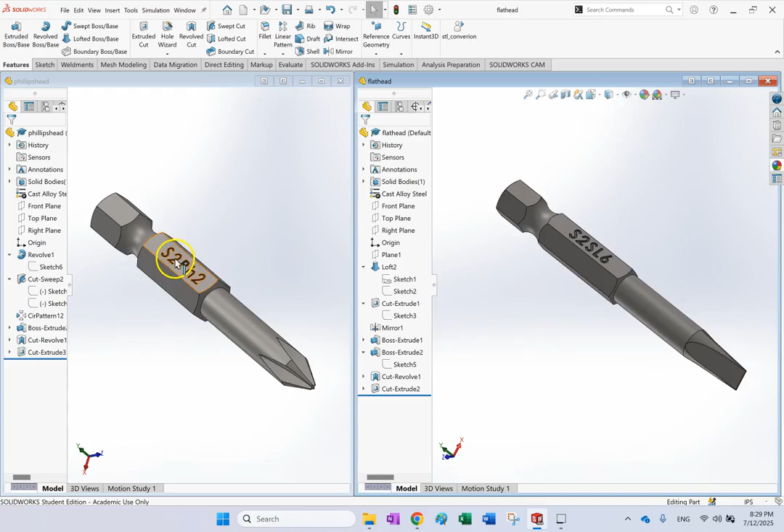Hello everyone. In this video, I want to show you how to make flat and Phillips head screwdrivers, the head part of them. I was working to make these ready for my lecture tomorrow in my CAD class, and I saw that although they look not very complicated, they might have some interesting features I want to talk about, like these letters you see on them, S2PH2 or SL6. I want to briefly tell you the meaning of these letters, so if you're dealing with any of them, you have an idea of what they are.

So for the flathead, let me talk about the dimensions. This is a flathead. Basically there is only a small narrow rectangle, as you can see, and there is this circular cross section, and the head is connecting them together, so it looks like a loft to us.

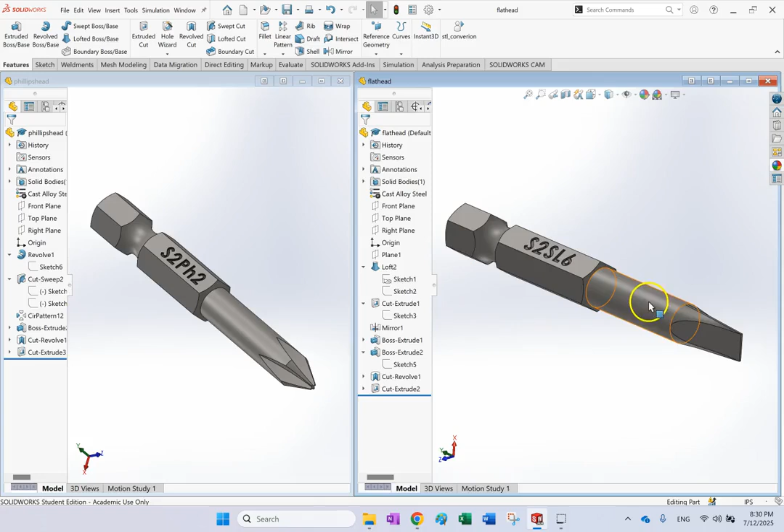The size for it, the letters on it, say S2SL6. What does that mean? SL means slotted, which is another name for flat head screw or screwdriver, meaning just one single rectangle. S2 is the name of the steel used here. And 6 is the width of this head - this dimension from top to bottom is 6 mil, so it can be used to open a screw whose slot is only 6 mil wide. So that's S2SL6, and it's quite clear.

For instance, if you look at these pictures, you can also see that - this is head size 3, SL3, SL4, 4.5, 5, 5.5, 6, and as you go from left to right, it gets wider and wider. So that's what a slotted or flathead screwdriver is.

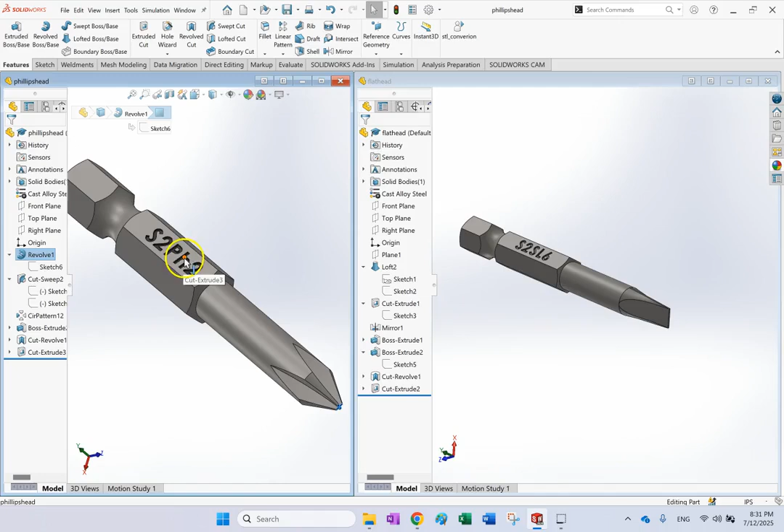On the other hand, for a Phillips, which has basically a cross at the tip, it's very easily distinguishable from a flat one. The only difference is here it says S2PH2 - again S2 is the material, PH means Phillips, and 2 is the dimension.

Now 2 here is not necessarily the width of this guy from left to right. The dimensions for a Phillips are a little bit not completely linear as you'd expect. For instance, if I have a PH2 screwdriver, you might say the size of the head is 2 mil - not exactly, it's actually 2.29 mil. Or if it's PH3, this is 3.81.

And what kind of screw could you use it to fasten or unfasten? PH3 is used for M6 and M7 screws, M3.5 to 5 use PH2, 2.5 to 3 use PH1, and zeros and double/triple zeros are used for smaller screws. So as we move from smaller to bigger numbers on these PHs, you're able to open bigger or smaller screws, but this number and the actual dimensions are not exactly the same. That's regarding the letters you see on them.

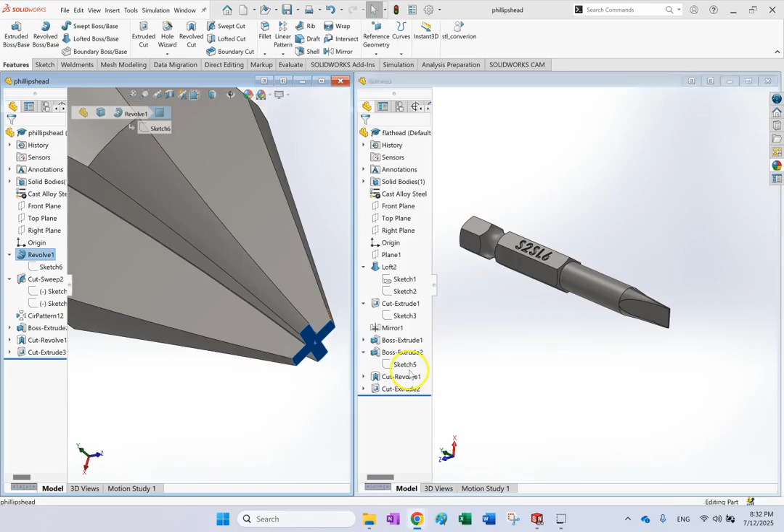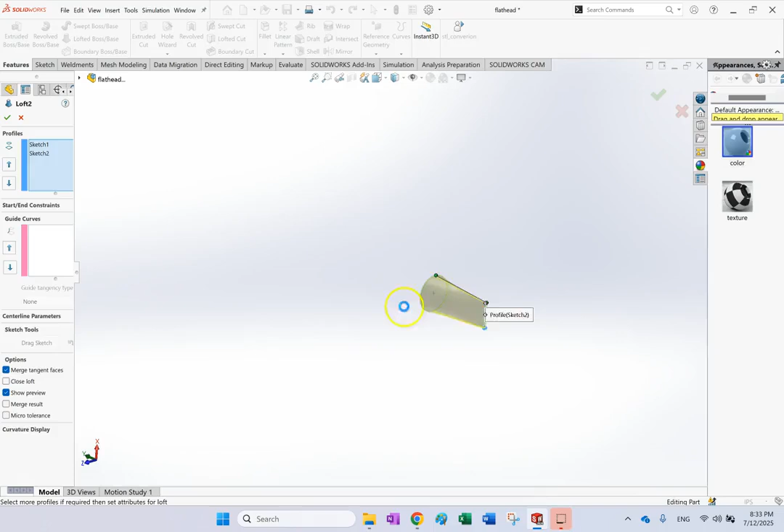Now, how do we make them? For a flat one, as you'd expect, the first part is simply a loft. I have a circular cross section and a narrow rectangle on two offset planes, and all I need to do is connect them with the loft. The only important thing is to make sure these two points aren't misaligned - if a point comes here you'll get a twist. Make sure the points are right in front of each other, as you can see, and that gives you the first part.

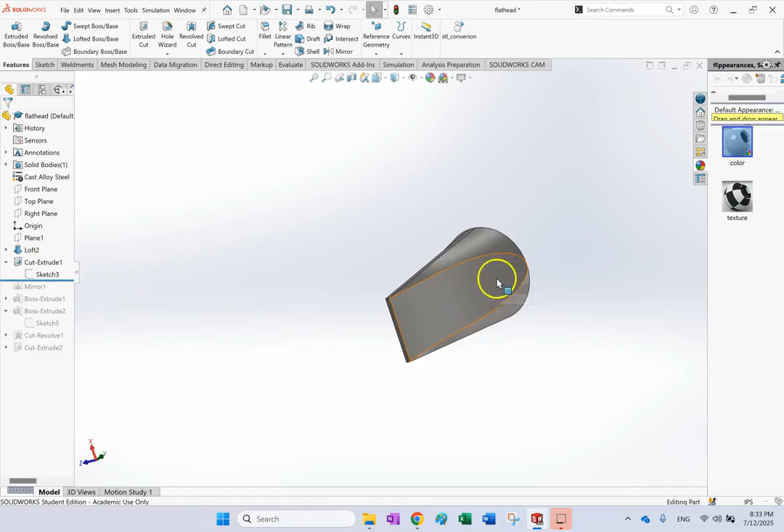The second part is those cuts that you see, this one here. This is just so you remove - let me show you from the side - this portion of the material. Compare it with this side that doesn't have it right now because I removed the mirror. This is so the head can easily be inserted into the head of the screw, so we remove some part of the material.

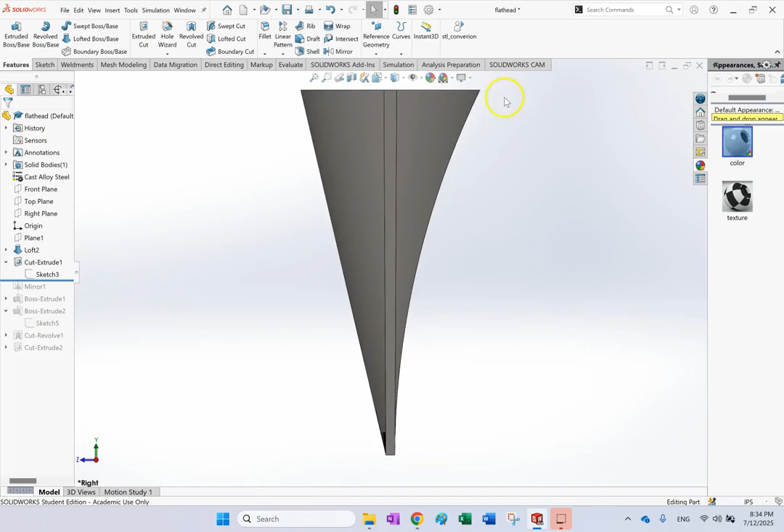And as you can expect, it's basically a cut extrude, that's all it is. The profile for it is something like this - that's all you need, basically this arc here and two lines.

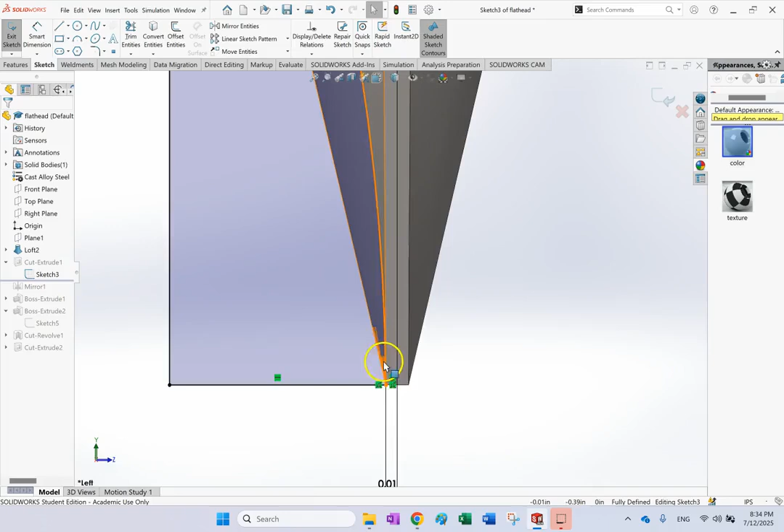If you want to get it exactly as nice as this, so that this surface's end looks like an arc and reaches the end of this rectangular surface here, then you need to make sure in this sketch this arc is tangent to this vertical line. So you see here I have a tangency - if that tangency isn't there, those arcs will not get to each other.

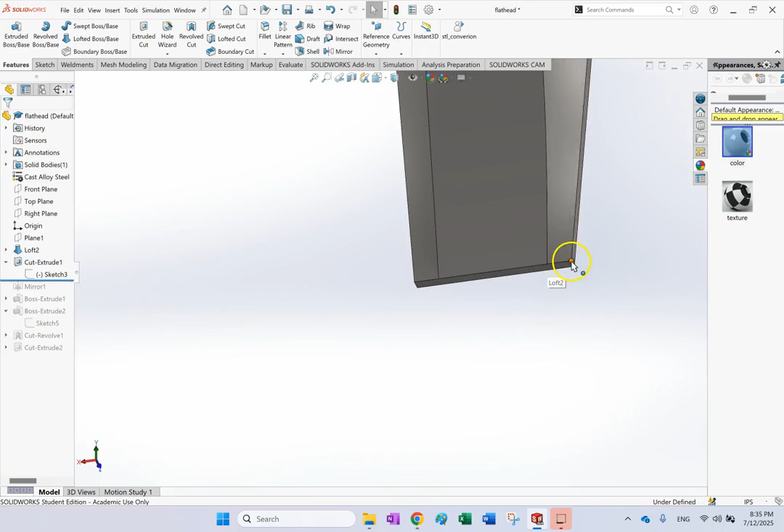Let me show you - here I get rid of the tangency and make it non-tangent. See what happens? Look, you see that? Now there's this gap between them, and the end of this arc and the end of the rectangle surface don't reach each other. So make sure you definitely have that tangency condition, so you get the proper cut.

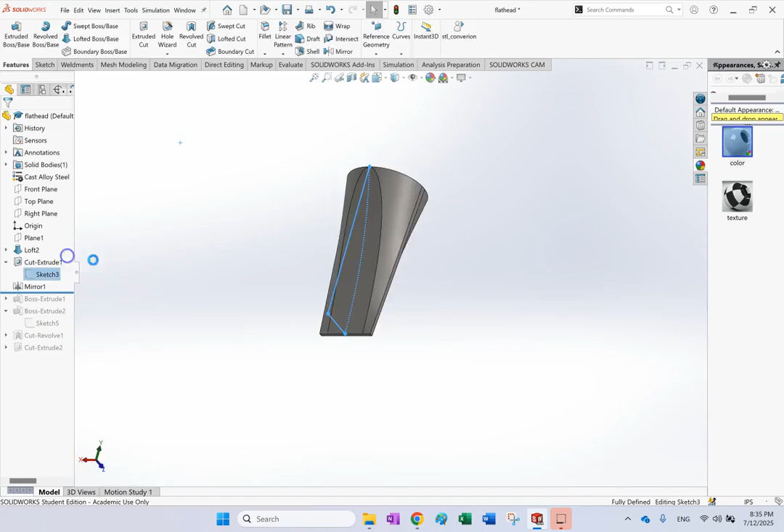Okay, so now that I got that, I can go ahead and mirror this. Let's go ahead and do that. Let me update this and make sure this sketch is right - I guess the tangency, let me do it one more time just to be safe.

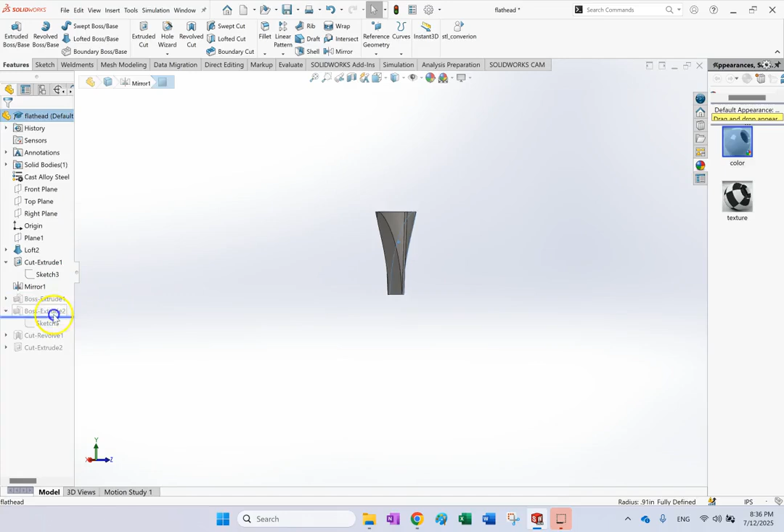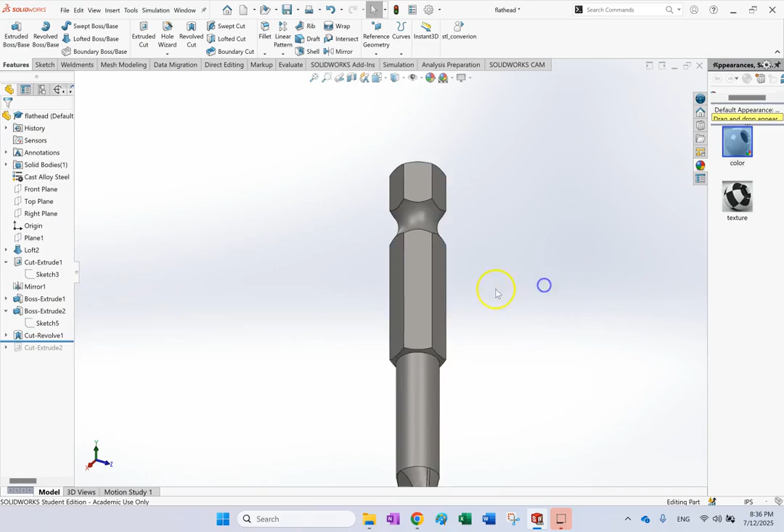Okay. There we go. Right, and then of course you're gonna have some extra extrusion here for the shaft. Then you have the hexagonal part, right? So here, look, there we go. And then you're gonna have a cut revolve, which is gonna make this surface for you, this surface, and this surface. And finally, you have your final cut extrude, which is basically these letters.

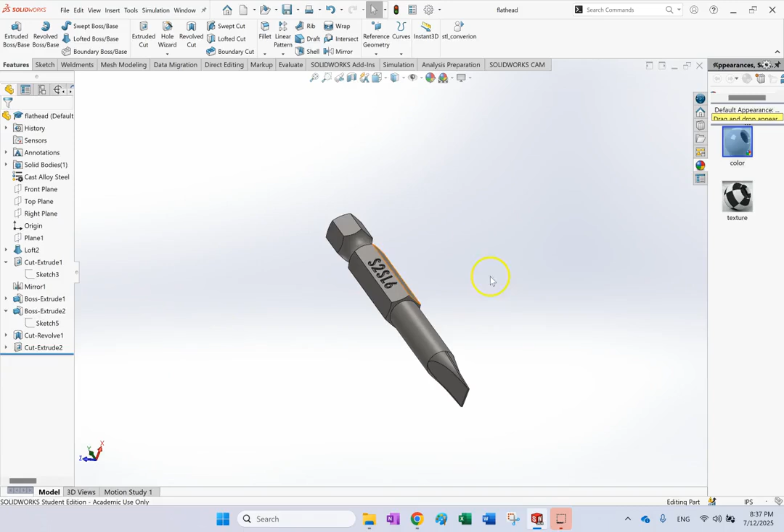Okay, so this is how you make a flathead, right? Which is what I just made for you. Of course, I just went through it, but the goal is to make this video short. So this is basically what you made, the flat. Now, of course, if you want to make it very accurate, you need to make sure what are the dimensions for SL6. So here my dimensions are not 100% accurate, okay? They're kind of a little bit arbitrary.

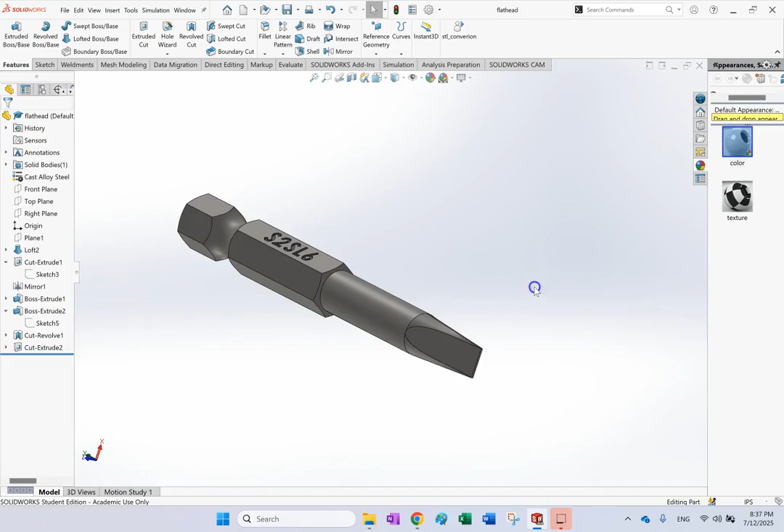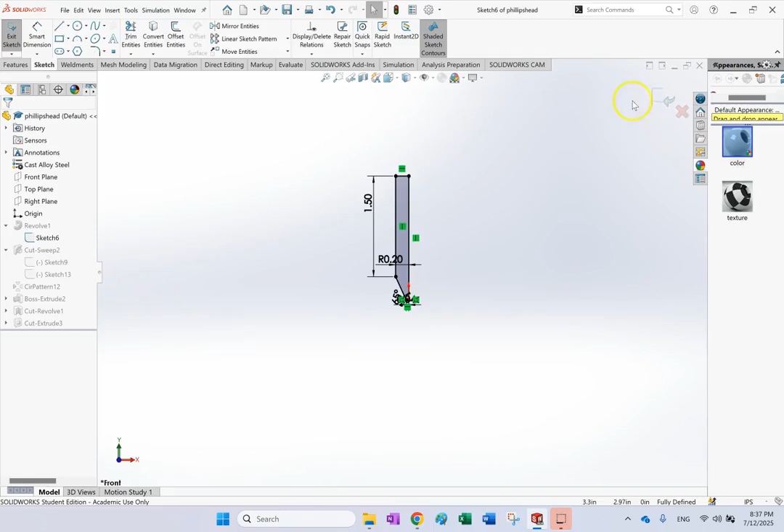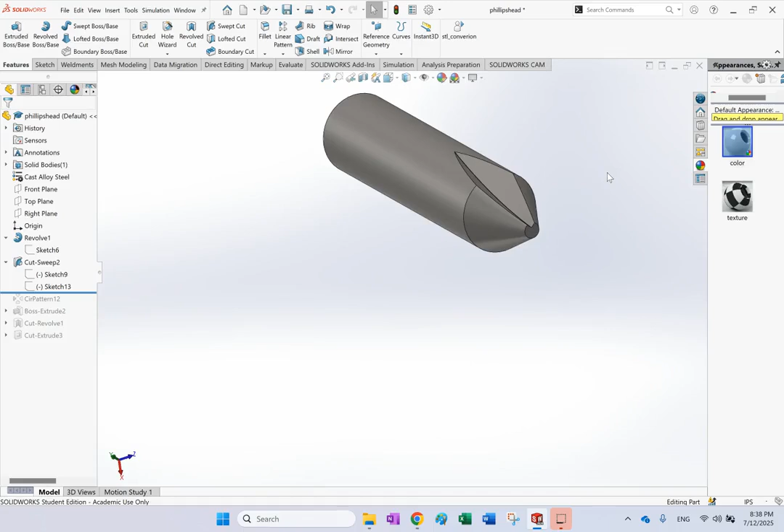And once I have this revolve part, the only really interesting part is this cut in the head, this guy. So how would you make one of these, right? And then once you do a circular pattern with 4 instances, you're gonna get the Phillips head. So the only thing is to do this, and the best way to do it is a cut sweep. So the way that I did it, I have this sketch, which, if you can see, is a square basically rotated 45 degrees and offset from the origin.

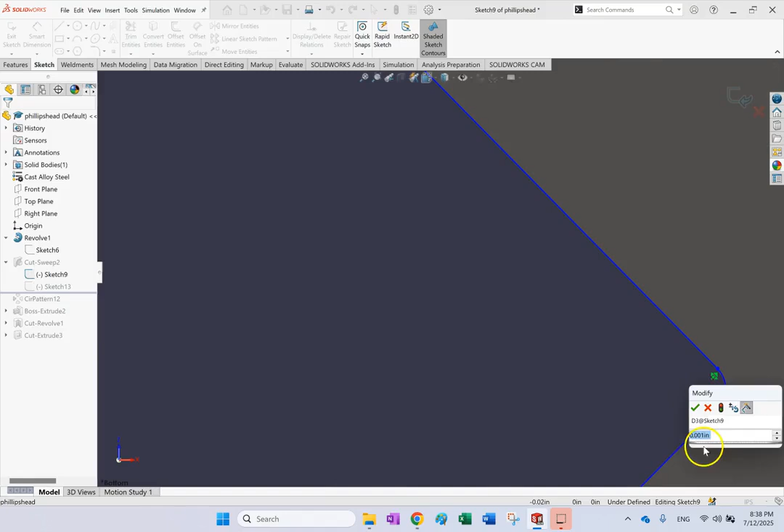So if you look at this, you clearly can see that I have offset from the origin. These offsets are numbers that, again, I arbitrarily provided. These are not 100% accurate. And then I provided a fillet here at the corner. Now, if this fillet is too small, feel free to make it a little bit bigger. So make sure that it has a little bit of fillet, right? And there we go, you see? So that is my sketch.

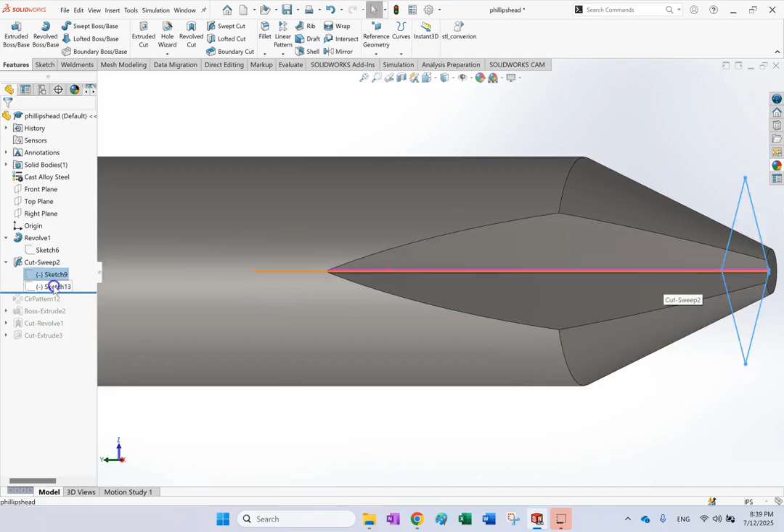And then this sketch has to go along a guide curve where it is a line at an angle. So if you look at this line from the side view, let me show you. If I show you from this direction, this is my guide. You can use a line or you can use a curve. In this case, I use the curve. As you can see, that line is just a construction element. This curve is really what I want that rotated square to move along.

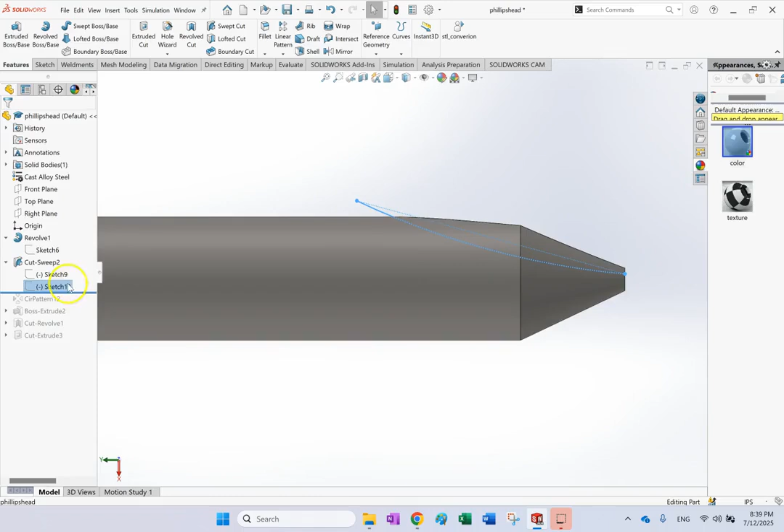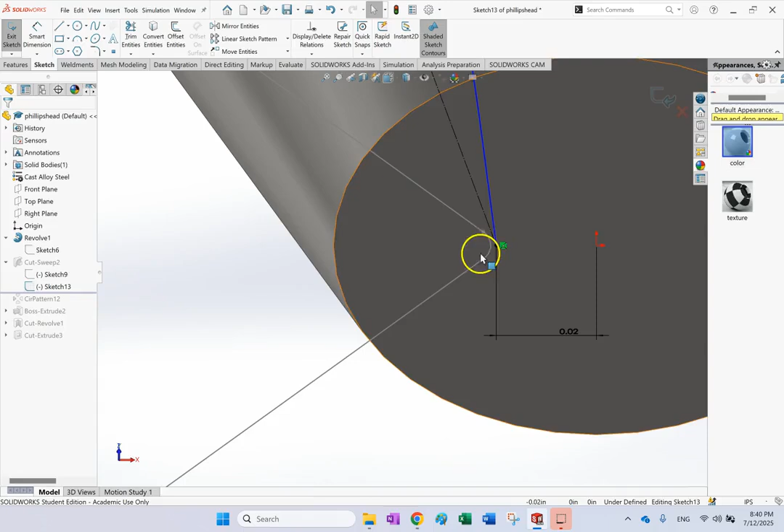But if you open up this sketch, this is my sketch, right? So this is my line, and then I made sure that this curve starts inside or close to that original sketch. It doesn't need to be exactly on it. This endpoint is not like loft. It doesn't need to be on the original sketch. Originally, when this radius was smaller, it was inside of it. Now it's outside of it. Both of them are fine.

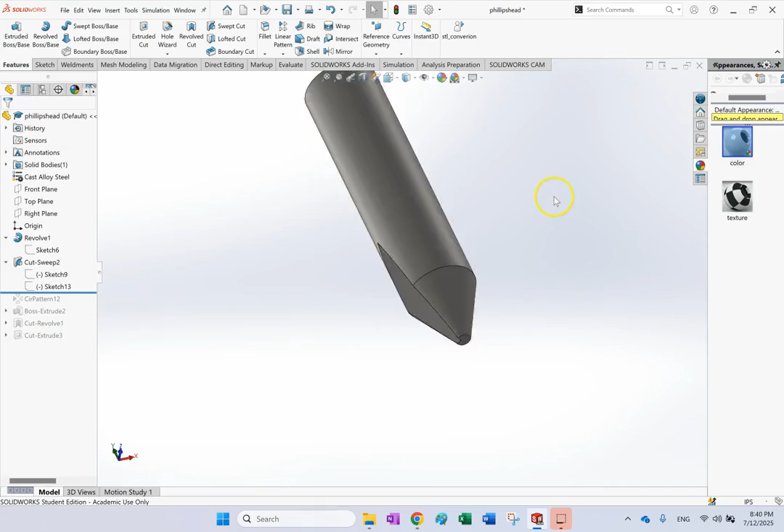And then I provided some numbers. Again, this is not fully defined. It's just for the sake of demonstration. And this is what I have. You can use this line, but it's not going to be as realistic as when you do it with a curve like this. This is much closer to the ones that you see in real life. These all have this kind of curvature with them.

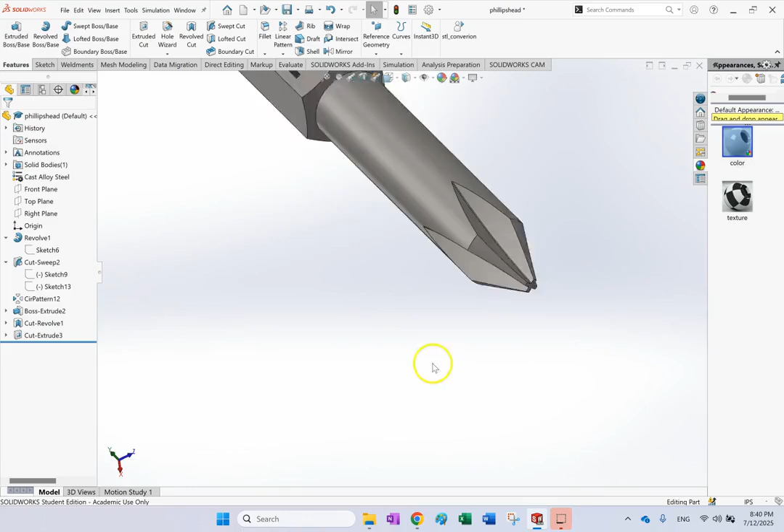And then all you need is to do a circular pattern about the axis of the shaft, which you can see here, right? Or you can use the surface as your reference. Then I added again the hexagonal part, I added the cut revolve, and I cut the specification letters, okay? And now clearly you see that this part is the crosshead, which is specific to a Phillips head. So there we go. This is your Phillips head, and that was your flathead.

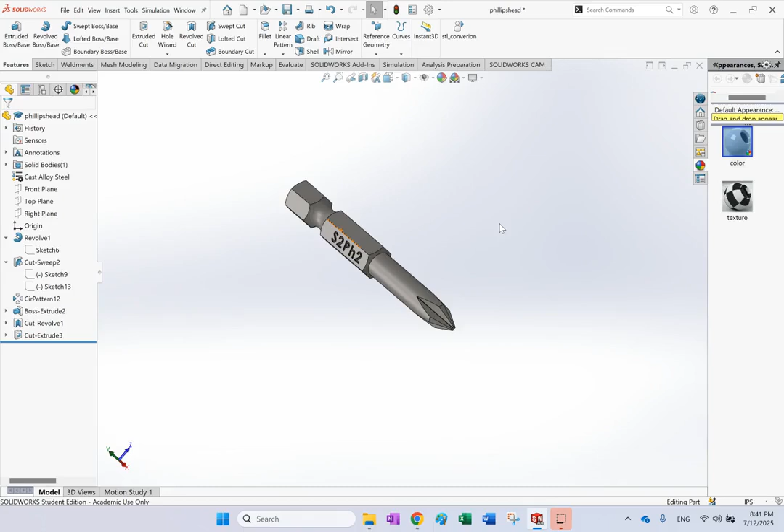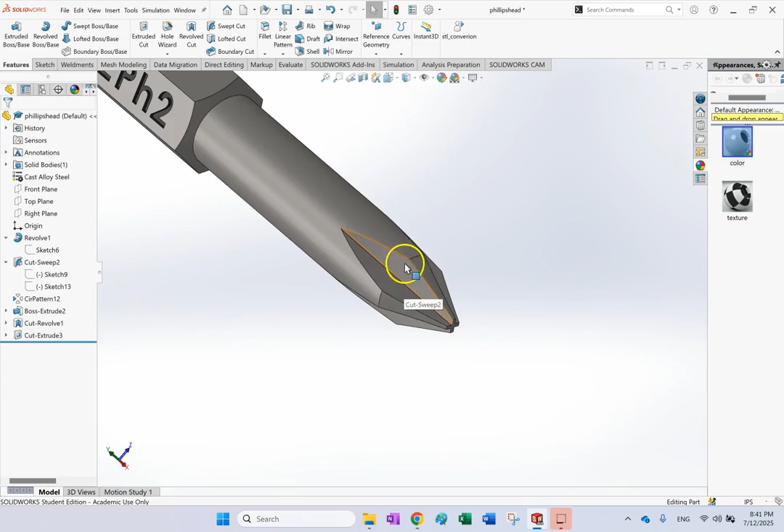So for the flathead, I used a loft and a cut extrude basically. And for the Phillips, I used a cut sweep. This is the main thing, revolve and cut sweep. But again, there are other ways to do it. And some of the ones that you see in reality have some extra feature here. Okay, so that needs some extra operation in CAD to make it. Some of them have something here in the middle, a little bit of an extra feature. So this is like a simple version of it.

I just wanted to share how to make these two things that look very simple, but are not really simple if you haven't done them in the past. So hopefully now you know how to make these two heads in SolidWorks.